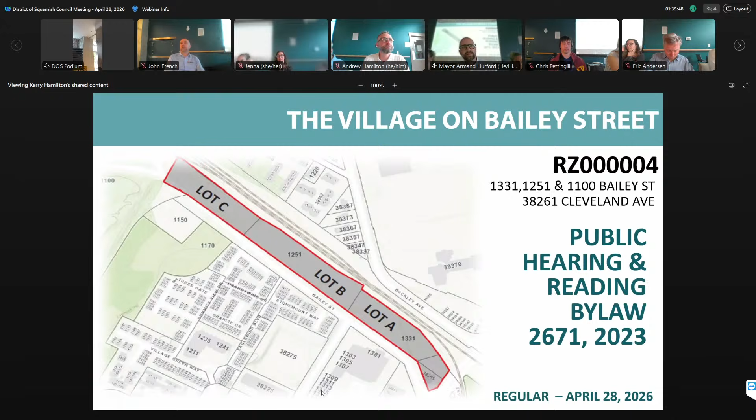And now we can't change slides. One second. I might have to call IT over one more time. My apologies. That's okay. Once we hit our stride here, it'll be good. But this is the challenge with changing the normal way we do things. Oh, there we go. I think they've done things from over there. Yeah. Are they going to manually do it? Yeah. Just in. Yeah, we're good. Good. Yeah. Okay, there's some, okay. This might be a little, we'll work with this, what we got.

So for the purposes of public hearing, I will be presenting a brief background on the project and history of the site, a general overview of key information pertaining to the application, a summary of the zoning changes proposed to CD 107 since second reading, an overview of how each condition of public hearing has been met, a table of the voluntary community amenity contributions, which we call CAC for short, and additional amenities offered for this project that will be secured in the land development agreement, or LDA for short. A summary of adoption conditions followed by staff recommendations for council consideration this evening.

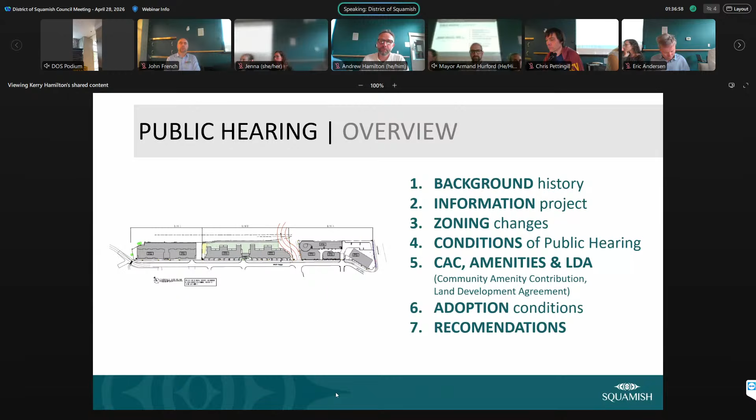Dating back to 1967, these photos show the site primarily used for industrial rail activity, showing limited vegetation on the site with a narrow strip of trees at the west end. This photo also shows a historical road connection through the site to Buckley Avenue.

Another photo from 2005 continues to show the industrial rail use of the site, predominantly now on Lot B and Lot C, and shows how Bailey Street and Old Buckley Avenue Road were aligned before the Eaglewind development was built. Next slide, please.

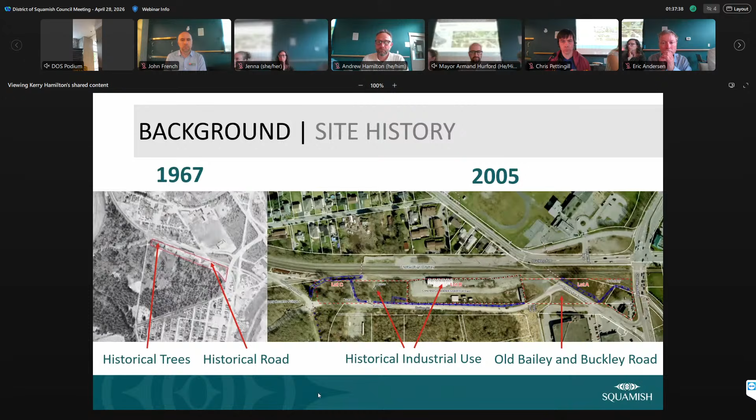In 2017, the District of Squamish official community plan was adopted, identifying the east portion of the site as downtown gateway and the west portion of the site as downtown residential. Next slide.

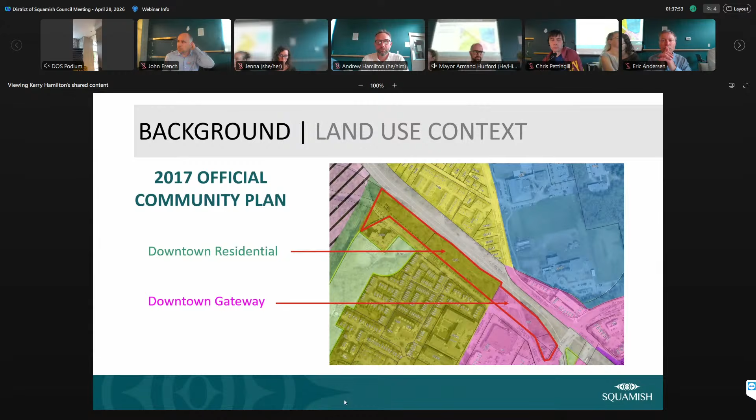This application was first presented at a September 2021 Committee of the Whole meeting and presented again at the May 2023 meeting. The project has hosted 2 public engagement events and 2 community stakeholder meetings specific to the hybrid theater use. It was presented for first and second reading on July 4th, 2023, where council gave the project first reading with a number of conditions to address for second reading.

The project was brought back to council for second reading on May 7, 2024, and council gave the project second reading with 7 conditions to be addressed at public hearing and more information requested regarding the hybrid theater, the parking structure, and the no gas covenant. Today's presentation will present how all these conditions and questions have been addressed.

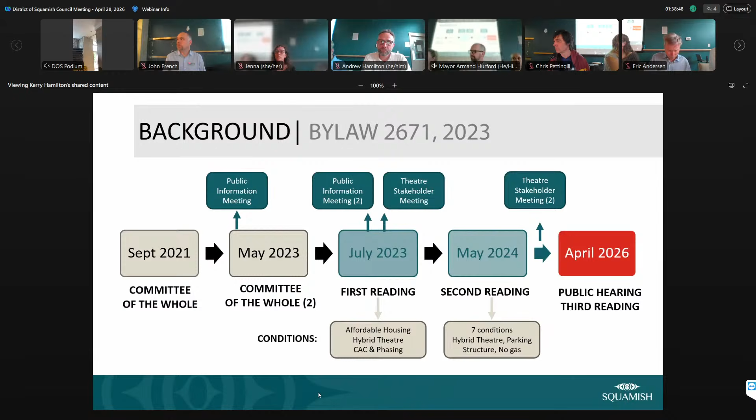As a quick overview and reminder, the development is broken up into 3 lots, A, B, and C, as outlined in the image on the slide. Lots C and B are primarily residential buildings with a total of 191 market units, with a small portion of ground floor commercial at the east corner of Lot B.

Lot A is predominantly commercial employment buildings with roughly a total of almost 9,700 meters squared of commercial use, along with 39 affordable units. In total, all 3 buildings are proposing 230 residential units and securing 9,800 meters squared of commercial space. Please note there was a minor error in the bylaw, which spoke to the commercial area as a whole, and it should read 9,800 meters squared, instead of 10,000 meters squared. A revised bylaw has been circulated for council this evening.

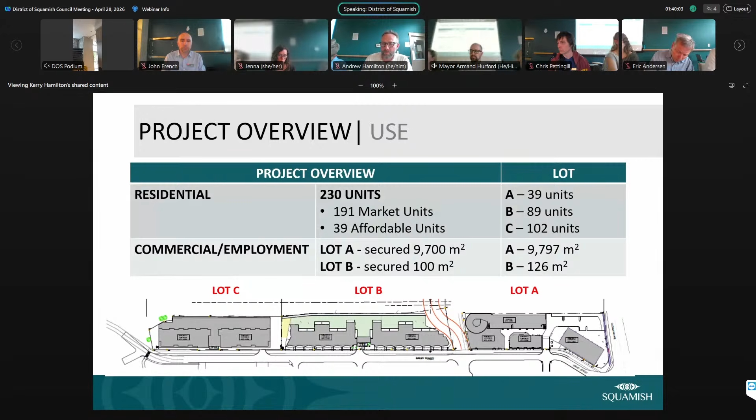As a general parking overview of the development, off-street parking refers to parking provided on the site, while on-street parking is parking provided on-street. The project as proposed under the zoning bylaw would require 552 off-street parking stalls.

The project is proposing to provide 560 stalls. There are roughly 120 on-street informal parking stalls on the north side of Bailey Street. With the completion of the north side of the road, parking will shift to the south side, where 52 on-street stalls will be provided. A public right-of-way will also be secured in the 218-stall parkade on Lot A, and this is to allow for paid public overnight residential parking options when the parkade is not used for commercial use.

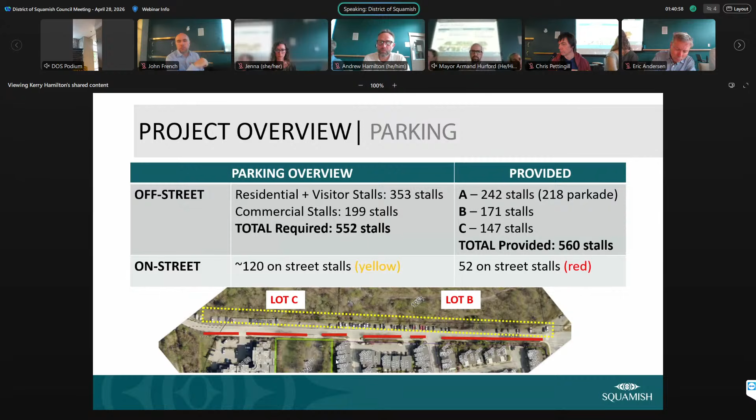These next slides will provide a general overview of each lot, as well as identify where any zoning changes are proposed on these lots.

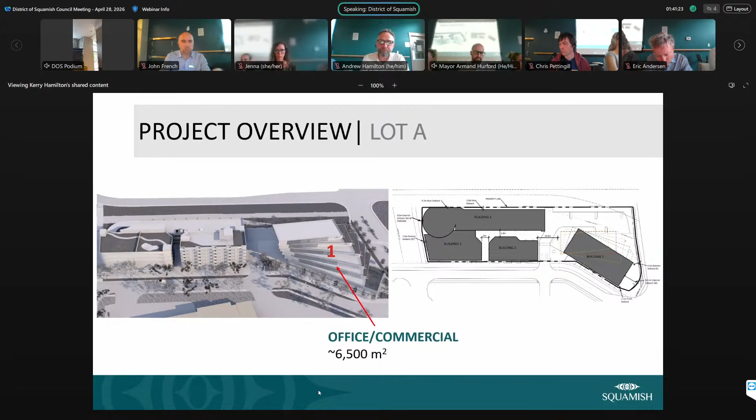Lot A is divided into 4 buildings. Building 1 is a 6-story office and commercial building with roughly 6,500 meters squared of commercial and office space. Building 2 is also a 6-story building, offering roughly 640 meters squared of ground floor commercial space and 39 affordable units. Building 3 is a 5-story building secured to offer both the hybrid theater with a minimum of 300 seats and a childcare space.

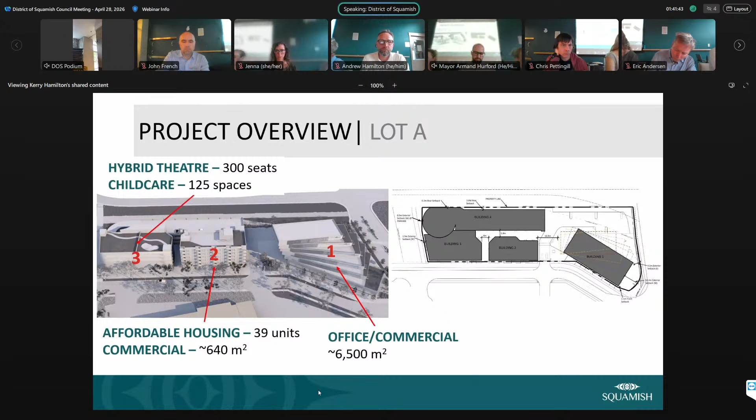With a minimum of 125 childcare spaces. Building 4 is a 5-story parkade offering 218 parking stalls. The site is also proposing to offer 28 surface parking stalls behind Building 1.

Some property line adjustments were made from second reading to public hearing. As a result, bylaw changes to Lot A include changes to the setbacks for these particular areas that you can see circled on the screen.

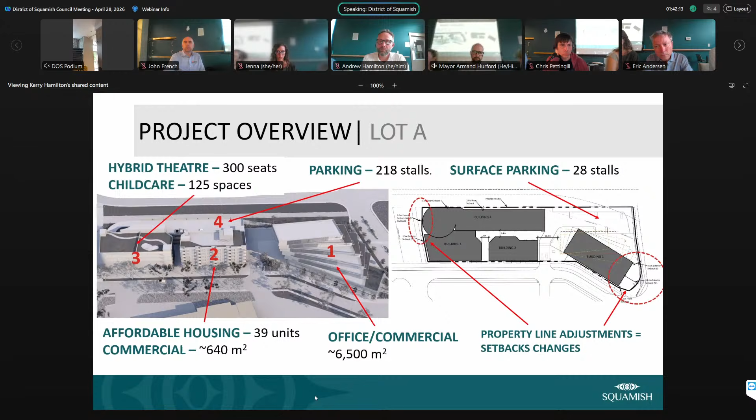Lot B is identified as Building 5 and is primarily residential with 89 units proposed and 100 meters squared of commercial area secured at the far southeast corner of the site. The site proposes 14 ground floor access townhouse style units fronting Bailey Street.

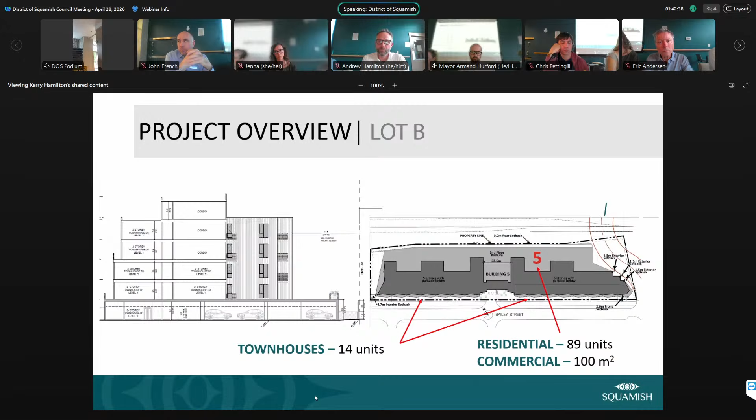Since second reading, staff have recommended that a road reservation covenant be secured on a portion of Lot B to provide the district with options for a future road connection through the site. As a result, this has impacted the original design of Lot B to achieve its original approved density and allowed units.

Staff are recommending 2 changes to Lot B zoning to accommodate the loss of the buildable area. First is to reduce the required commercial area from 300 meters squared to 100 meters squared, and by allowing a height increase of the building from 5 stories to 6 stories. It's important to note that the overall density of the site has not changed. The additional height is intended to offer some site design flexibility, but would not result in increased units or a 6-story building being able to extend the full footprint of the site under the allowed density.

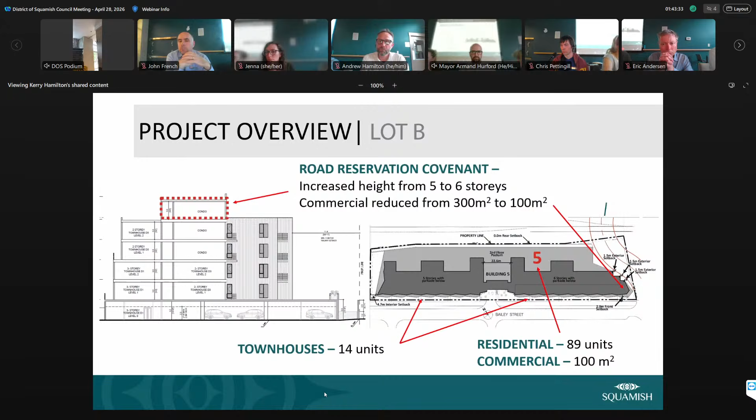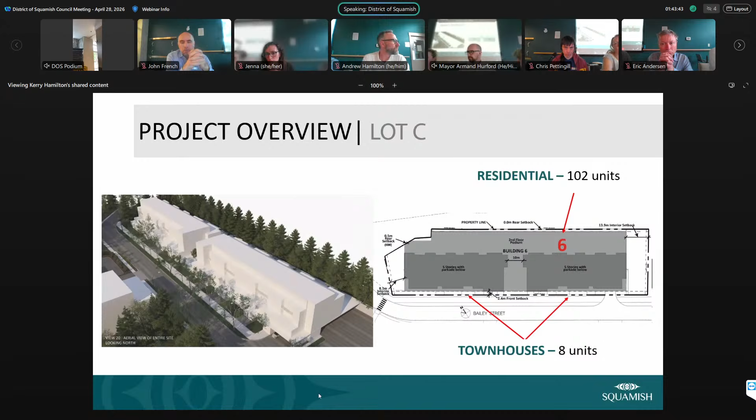Lot C, known as Building 6, is a 5-story residential only building with 102 units proposed, including 8 ground floor access townhouse style units fronting Bailey Street. Since second reading, little has changed on this site, with the exception of adding a new setback to the northwest corner of the site to further protect the environmental habitat area.

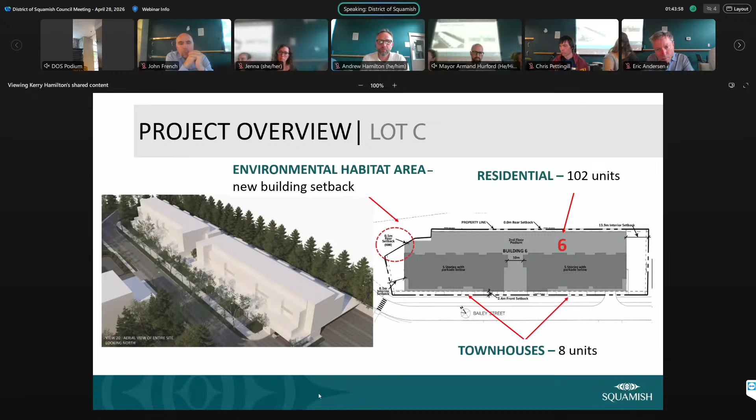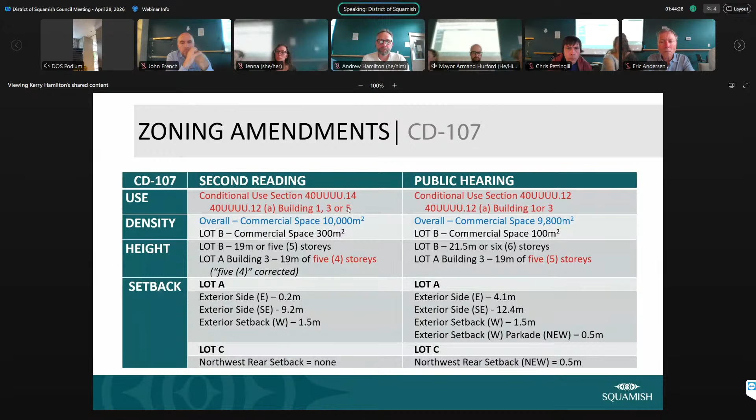So the phasing for the project is as follows. Phase 1 is the Lot B market residential units. Phase 2 is the Lot A building 2 with the 39 affordable housing units. Phase 3 will include Building 3 and 4 with the theater, childcare, and parkade. Phase 4 is the Lot C market residential units. And Phase 5 is the final building 1 with the commercial office building.

The phasing plan allows for Phase 1 to help offset initial site and infrastructure upgrade costs while delivering on key district amenities in Phase 2 and 3.

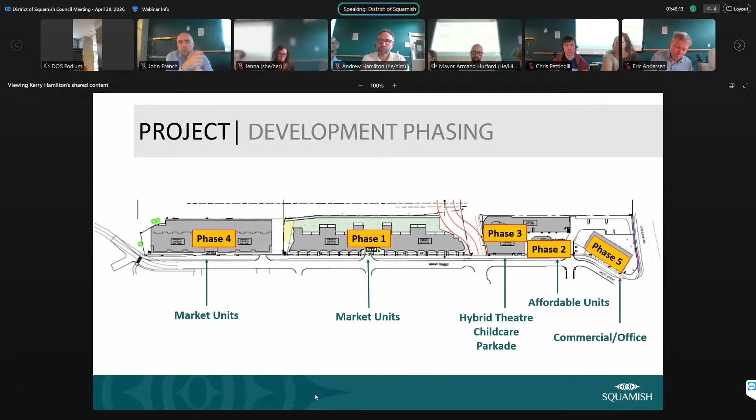At second reading, Council approved the following motions, which included 7 conditions and 3 issues to resolve prior to moving forward with public hearing. The next few slides will outline how these conditions and issues were addressed.

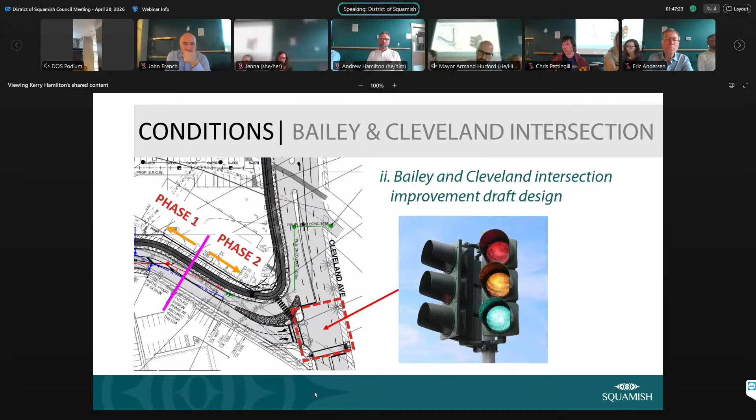Second condition was for a draft design of the Bailey and Cleveland intersection so we can secure any improvements in the land development agreement. Draft designs for improvements at the Bailey Street and Cleveland Avenue intersection have determined a need to fully signalize the intersection prior to build out of Phase 2 of the development. This means all road improvements west of that pink line on the screen will be built out by Phase 1, while the remaining roadworks, including the Cleveland Avenue multi-use pathway and the intersection improvements, will be built out by Phase 2. This intersection is part of a larger downtown entrance project, and the final design details will be confirmed through that project.

Condition 3 and 4 require complete and staff-approved traffic and flood modeling reports to ensure no changes to the zone or LDA conditions following public hearing. The traffic impact assessment report was completed and reviewed 8 intersections close to the site.

The report concluded 2 key recommendations secured in the land development agreement to address the increased traffic this site will generate. First, it is to extend the northbound left turn bay on Cleveland Avenue at the Buckley Street intersection, represented by that red arrow on the screen, and to signalize the Cleveland Avenue and Bailey Street intersection, as was previously highlighted and circled here in red.

The flood modeling was required as portions of the site are situated within a secondary floodway, shown as the striped line areas on the image on the right. It's also within a conditional densification area as defined in our OCP. The flood modeling was completed and confirmed that the proposed development does not increase any flood risk to adjacent sites.

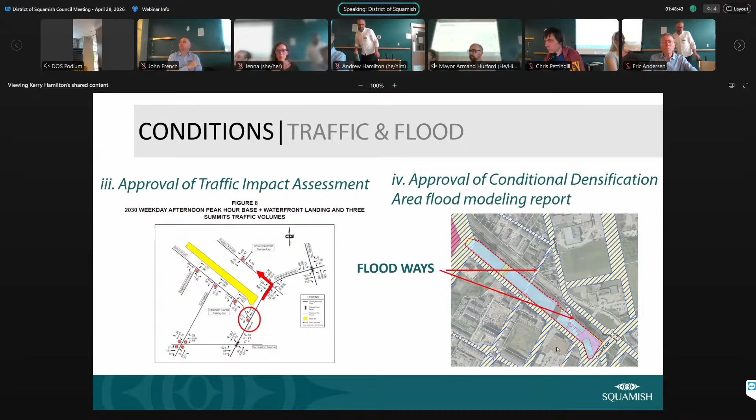Condition 6 was compliance to the CN development guidelines, established as part of the Federation of Canadian Municipalities and the Railway Association of Canada. These guidelines outline a number of building design guidelines, including safety barriers, building standards to address noise and vibration, and design mitigation to adjacent lands.

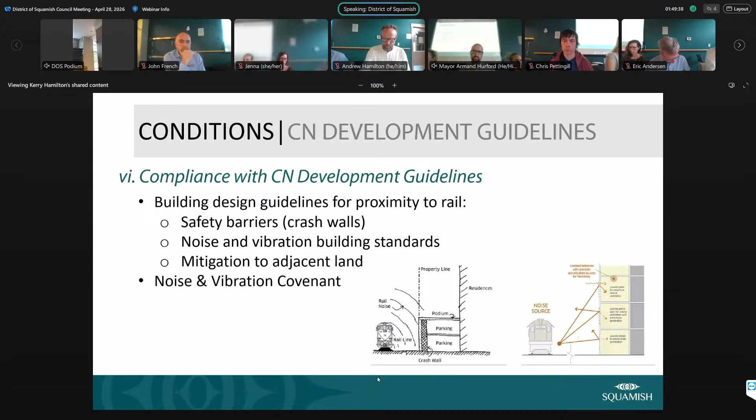The development is proposing safety barriers consistent with the guidelines, and reports have been conducted by acoustical engineers to determine noise and vibration building requirements. These will be secured in the land development agreement. The district also has a policy to register a noise and vibration covenant for buildings so that owners are aware of the rail proximity when purchasing, and it will be registered again at the development permit stage.

So specifically for this development, safety barriers proposed include a crash wall for lot B and C, and the parkade on lot A, identified by the arrows in red, and a compliant ditch design is proposed along the remaining open parking lot area for lot A, as shown in the yellow line.

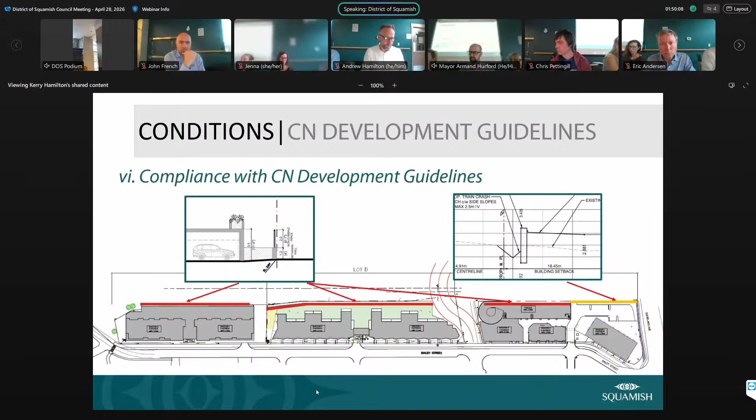The final conditions, 5 and 7, were related to completing environmental reports and securing a no-gas covenant for the entire site. A no-gas covenant for the entire site is now a condition in the land development agreement and will be registered on title at development permit.

Both an inventory and assessment of on-site trees was conducted by an arborist, and a site bioinventory was conducted by a qualified environmental professional. The reports noted the historical industrial use of the site and the mature vegetation at the west of the site. As a result, 28 trees, riparian vegetation, and ditch 1 will be protected and enhanced along the western side of Lot C.

Ecological compensation for the loss of on-site trees and ditches on Lot A and B will be provided through required on-site replacement trees and the creation of bioswales along the new north side of Bailey Street, which will include street trees. The report also includes restoration, invasive species removal, and native vegetation replanting and enhancement of both the south area of the parklands adjacent to the Park House development and the forested area to the west of Lot C.

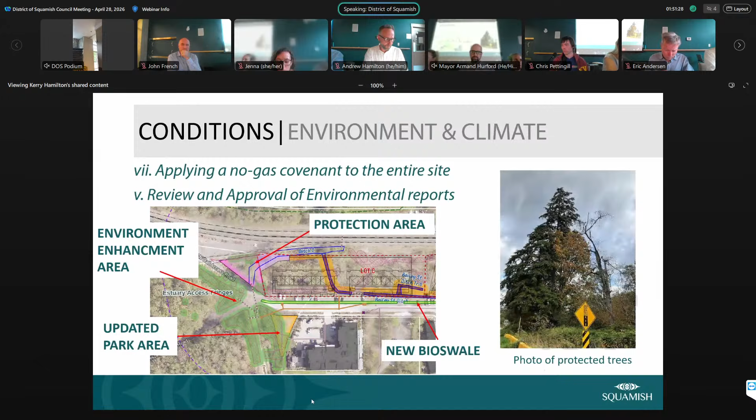All right, so moving on to the other motion at second reading.

At second reading, a revised theater design was presented to council, and the theater included between 300 and 325 seats and roughly 2,600 meters squared of floor area, with information on use and design features put forward in combination with Squamish stakeholders and a theater consultant. It also included commitments for dedicated community use for 10 weekends from Friday to Sunday at operational cost.

In early 2024, Squamish Arts also released a Squamish Arts Future Needs Study, which included guidance on various arts and culture needs in Squamish. It included a large performing arts hub with a long-term timeline and an objective of 400 to 500 seats, including artist residence, for a total of 2,452 meters squared.

At second reading, there was some concern raised with the hybrid theater not meeting this new future needs study, and council requested that staff bring the project back to the arts community to confirm that the proposed hybrid theater was supportable. The applicant did host a second theater-specific public engagement meeting in May 2025.

The meeting was well attended and provided an opportunity to discuss discrepancies between the proposed hybrid theater and the objectives outlined in the future needs study. Despite not meeting the desired seating requirements of 400 to 500 seats and artist residence, the project was found to meet and exceed the areas provided for many of the deliverables, such as storage areas, green rooms, rehearsal space, meeting rooms, and dressing rooms.

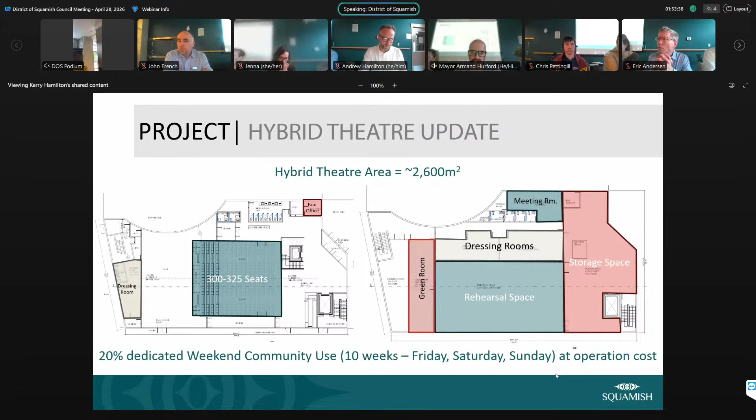At second reading, there was also a number of comments regarding the parkade design. The revised zoning package confirms that a 5-story parkade can be accommodated within the zoned height maximum of 13.5 meters, utilizing an open parkade design on the top floor.

The open top floor parkade allows for unobstructed views from the proposed childcare space, while still screening vehicles from view from the ground floor. The package also proposes a 7.5 meter distance between the affordable housing residential building and the parkade. Since second reading, our OCP guidelines have also been amended to include design conditions and form and character for parkades.

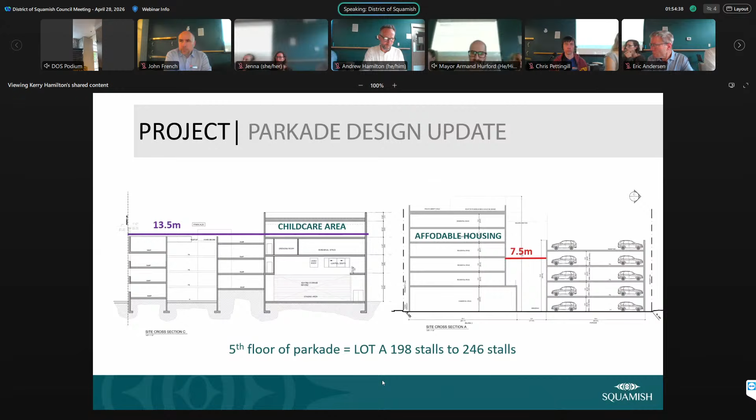With the addition of the 5th floor parking, the total parking spaces provided on Lot A has increased from 198 stalls to 246 spaces. So this application is subject to the 2023 Voluntary Community Amenity Contribution Policy, and no changes are proposed to that policy from second reading.

A brief overview of the CAC commitments are provided in the report and on the slide, and include details such as those affordable housing, childcare, hybrid theater commitments we've previously discussed.

CAC amenities also include a direct cash contribution to critical amenities for $1,221,000, and the policy's cash contribution to active transportation to be used to construct the multi-use pathway on the entire north side of Bailey Street, and a part contribution to go towards design and installation of additional play equipment at the existing Eaglewind Park.

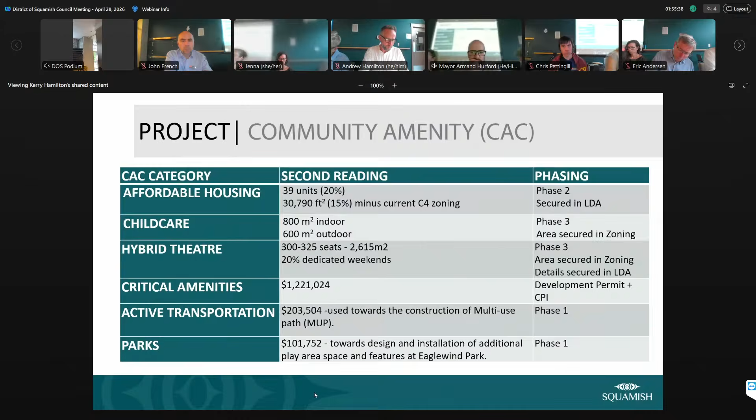As part of this rezoning, the applicants are also securing a number of additional commitments in the land development agreement. They include a new multi-use pathway through the 3rd Avenue and Bailey Street connection. This is required by Phase 1 and also includes securities to ensure a pathway remains open to the public at all times during construction. In addition to the Bailey Street multi-use pathway, a multi-use pathway is also secured for Cleveland Avenue.

The parkade is secured as an enclosed structure and paid public use of the structure, and relocation of utilities are required by Phase 1, with green roofs secured for Building 1.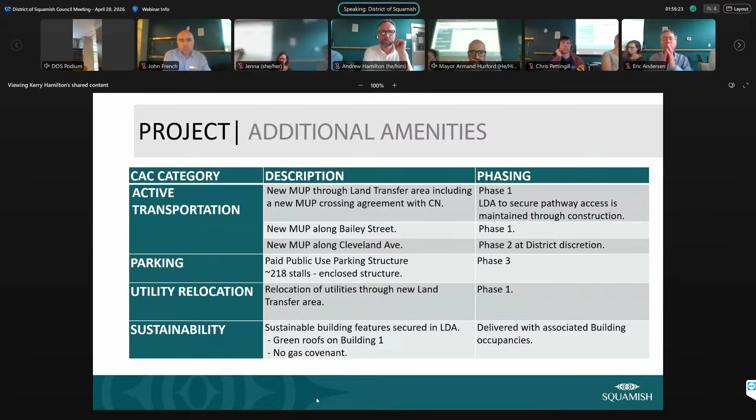Conditions of adoption include registration of a public right-of-way on BCR land known as the Town Dyke Trail, as you can see from this image on the left, and execution of a land exchange agreement between the district and BCR Properties, which will allow the district to acquire the area in green for the 3rd Avenue road connection and for the new multi-use pathway and utility corridor, and will secure the area in blue as a utility right-of-way.

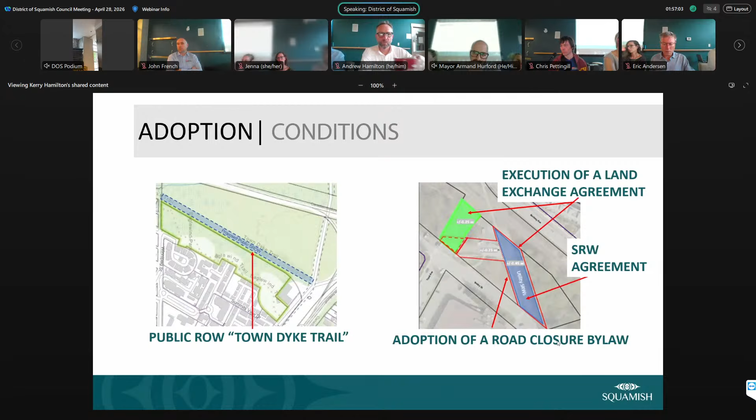BCR Properties will acquire the area in red, which is the solid outline, which will require the adoption of a road closure bylaw by the district prior to adoption.

To inform the community per policy, the application was posted to the district's development showcase, and a development sign was posted on the site. A developer-led public information meeting was held in May 2022 and in May 2023. Both PIMs were well attended by the public, with a total of 28 comment sheets submitted.

The applicants engaged with the art and theater community groups by hosting 2 different events, and both were well attended and expressed support for the theater amenity.

Attachment 5 includes all public comments received at the time of report publication, with 6 new comments received since publication. Notification through 2 ads in the newspaper, mailouts to properties within 100 meters was completed in compliance with legislation.

We are nearing the end. Following the public hearing, Council may consider the following resolution: that District of Squamish zoning bylaw, amendment bylaw CD zone 107, the village on Bailey Street, which is number 2671, 2023, be given 3rd reading.

And that prior to adoption of that bylaw, the following items be completed. They include the execution of the land development agreement, the execution of a land exchange agreement, bylaw approval from the Ministry of Transportation and Transit, registration by the applicant of a Section 219 covenant for flood hazard, and registration for the public right-of-way for the Town Dyke Trail.

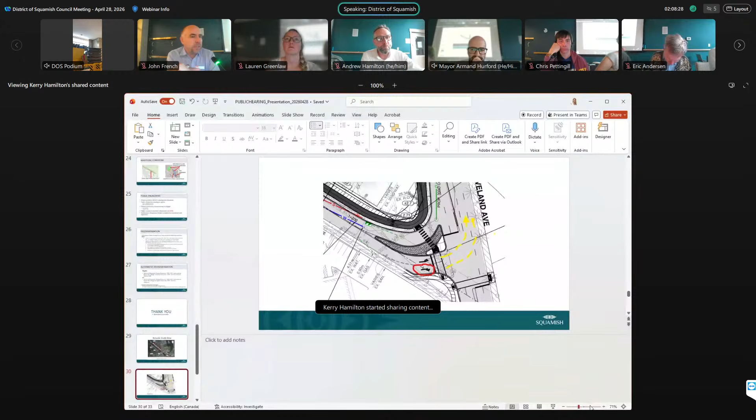Earlier I submitted a drawing, an image, and I understand staff has that. My question would be a lot easier if that image is available for everybody. I think we're in the process of getting that onto the screen. The proposed changes to the intersection of Bailey and Cleveland will be critical for traffic management if this project goes ahead, and the drawings in attachment 4 of our package are excellent. There's a lot of information there. The intersection drawing shows 2 eastbound lanes at the eastern end of Bailey: one lane turning right and one lane turning left. You can see that in the image.

The lane turning right, I've got it circled in red to show what would be coming off of Bailey and continuing south on Cleveland Avenue. I suspect that 90% of the vehicles at the eastern end of Bailey are going to be turning left. That's the reality right now. So to me it makes sense to spread that left turn volume over 2 lanes instead of just 1, to prevent stacking back onto Bailey. I see that stacking now most weekdays between 4 and 6, and when special events like the downtown parades are finished and people are trying to get out of downtown. So I'm wondering from staff, was any consideration given to the right lane being available for both right and left turns, as demonstrated in the image?

Thank you for the question, Brent McMurtry, Manager Transportation. Through the mayor, this design as prepared shows a right turn eastbound, as you identified, and we've confirmed with the consultants working with the developer that there's no reason it couldn't be a combined left and right to accommodate both movements. As you noted, the vast majority of the traffic is turning northbound, but there are some limitations with the storage length, so the number of vehicles that can actually fit within that right turn is pretty limited without more significant impacts.

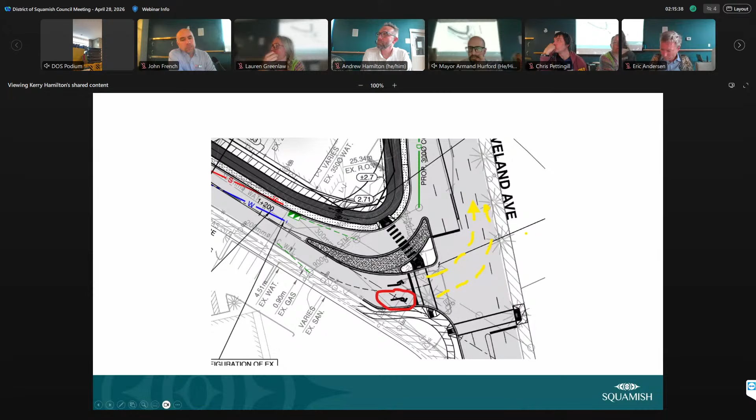So through the mayor, I don't have a perfect visual to show you here, but the crash wall is actually broken up in size and is planning to propose vegetation. That vegetation would get reviewed at development permit. So those design considerations, such as maybe anti-graffiti textures on the surface and things like that, can be reviewed at development permit.

Thank you. Other folks have raised issues regarding construction management, for example, how safe routes to school for pedestrians will be accommodated during the various construction phases, parking for the construction workforce, and also avoiding some of the issues that came up with the Jumar project construction, including the use of the old railway station space in the easement off of Buckley. How will staff address construction management planning during the respective phases of the project? Thank you.

Good evening, Mayor and Council. Jay Sternino, project engineer with the District of Squamish. Through the Mayor, the district has the ability to require what we call a construction impact mitigation strategy.

This is typically required where a construction project is expected to have an impact on typical functioning of neighborhood and/or local traffic. In this case, the requirements of the construction impact mitigation strategy would be confirmed prior to the issuance of building permit and/or servicing agreement, and construction cannot start until said strategy is in place. These construction impact mitigation strategies typically take into account traffic volumes, peak hours, and major routes, like the concern you suggested, and can specify locations for things like employee or trades parking, material delivery and storage, and any truck staging or queuing.

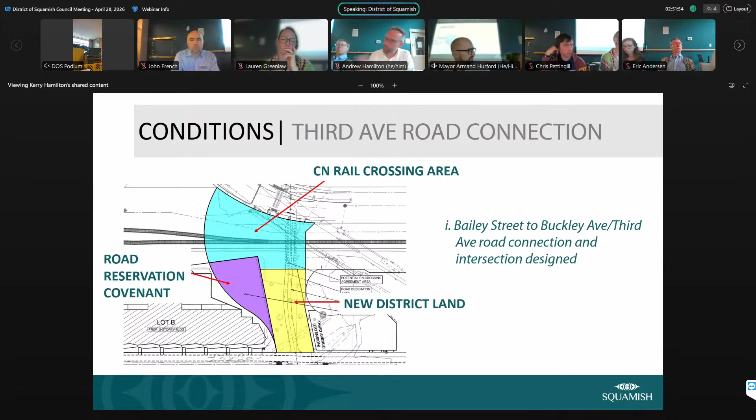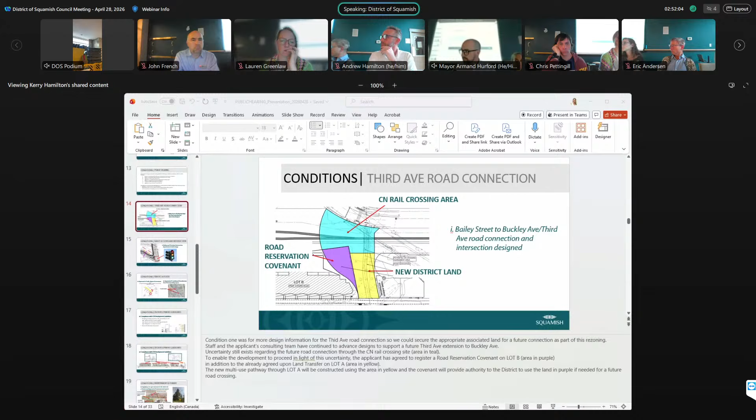Okay, thank you. Any other questions? I have two. One is, we have a program, Safe Routes to School. How were those standards applied to the review of this project? We heard a request for an overpass, which is a big piece of infrastructure, but how was access to the schools contemplated in this proposal at this point?

Through the mayor, so yeah, we know the current connection across the railroad is really a key connection for Squamish Elementary, Howe Sound, and the French school as well. What has been secured, or will be secured, through this rezoning is an improved multi-use path connection that would provide a connection from Bailey Street to the existing crosswalk that crosses Buckley, to facilitate and improve that connection that is there today. Okay, thank you, I'll hold my questions there.